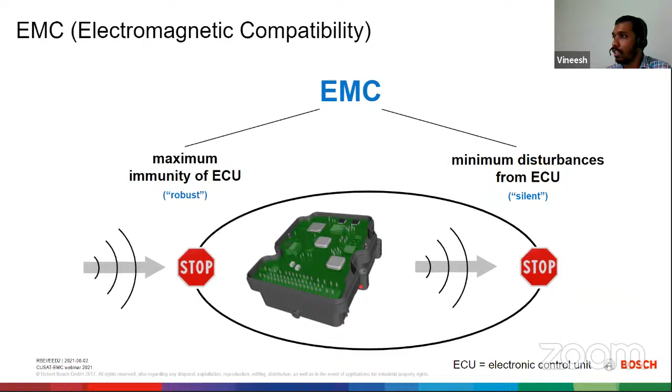So yeah, going to the next slide, you can see here, for example in the automotive world, when the unit goes into the external world, it can be interfered with. There are a lot of interference factors, which you might have already seen, like radio transmitting towers. There could also be radars, like military radars or airports. All these emit noise.

Apart from this, your unit is also an EMC source. When it goes onto a street or highway, it becomes multiplied, because there could be n number of such ECUs in different vehicles, so altogether it can lead to clustered interference. Apart from that, there are also static discharges, when your body gets charged up and discharges into the unit. All these are taken into account in designing.

How do we take care of this aspect of designing? We have testing. You have specific testing chambers that are needed to comply; that's how EMC compliance is met. You test these issues in predefined labs so that you are within the limit, you know what emissions are coming, and how much noise it can withstand. That's basically what we talk about when you go to the external world.

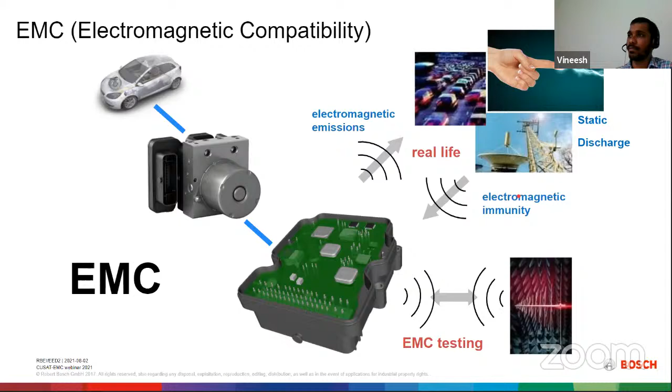Before I go deep into EMC, I would like to know from the audience, have you experienced any EMC in your day-to-day life? Maybe you can unmute so that it's live and more interesting. Or maybe, why do you feel EMC is important, especially when it comes to automotive? If anybody wants, you can either chat, put a ping, or unmute and speak yourself. I can wait a minute.

Yeah, Vineesh, we usually experience EMC when we receive a phone call and speak to someone. That's a natural one. Correct, usually everyone should have experienced that. That's one basic interference you would generally have met. You could hear the sound of interference from the mobile. So this is a kind of EMC.

Thank you Sujit for that. I think it's Sujit, right, who replied? Yes. Okay.

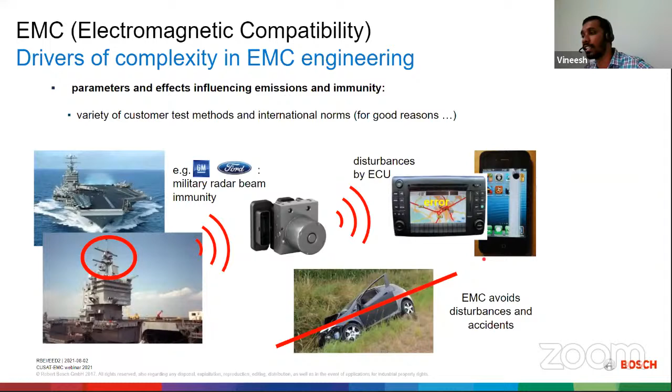So there are cases where it happened: accidents, a lot of failures, and those are the lessons learned from the industries, from the OEMs, from the tier one suppliers. They have now learned from previous experiences on this. So there are the external fields as well as the internal fields. Right now, what I am explaining is the external field. Now it goes to the internal field.

So in the internal field, this is a general view. You can see a car is no longer purely mechanical. It is tied to a lot of electronics. Even if you think of the very simple component, the battery, it's no longer a simple battery. It has battery management units. It has high speed buses, low speed buses, and electronic control units communicating every minute, every second, or millisecond,

like ABS, which looks at fractions of a second. So these all should not get interfered with. When you are at the wheel, these are all working together to achieve the goal that the passenger should be safe and should reach the destination.

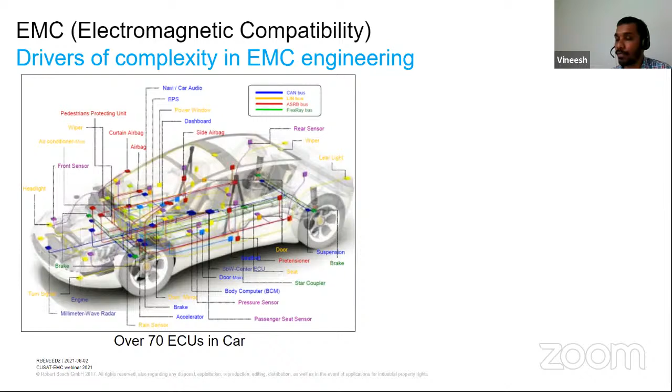So when it comes to this one, you see the routing in the harness. This is the complexity you see. The routing itself is so complex, it can itself act as an antenna. So inside a vehicle itself, it could cause interference. These are all the factors we have to look at when we look at an ECU, an electronic control unit, designed inside a vehicle.

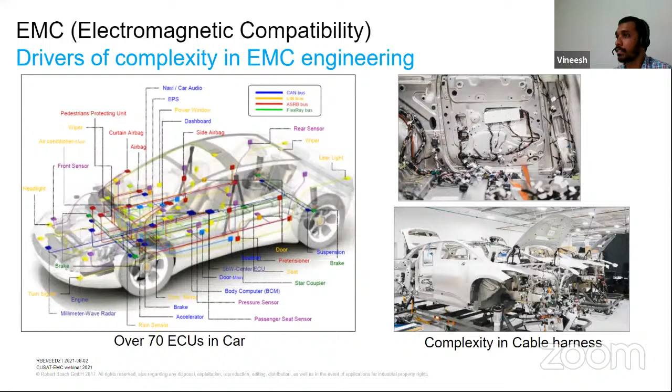So this is another aspect of EMC that speaks about the vastness of the EMC we are dealing with. For example, EMC doesn't just specify radio frequency or microwave frequency. It starts from a very low frequency, like kilohertz or hertz, and can range to gigahertz, like 6 gigahertz, 12 gigahertz. And due to more and more usage of the spectral content, we are also asked by the customers to go into higher and higher bands. Because the noise is spread across the frequency spectrum, we have to be compatible. That's why we have to deal with all these frequencies.

Looking at the power, you can see that the power we have to withstand is like 2000 watts, whereas some GPS module has to function maybe at a millionth of a volt. So imagine the scale as a 1 meter flag compared with the distance to the moon. That's the vastness we are dealing with in the ECU. You have to withstand huge power, and also operate at very low power levels. These are some of the things you have to deal with when you go into the EMC world.

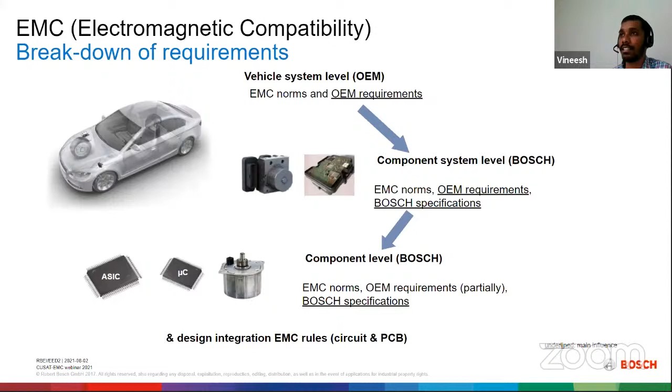So basically the trend, I think that may be coming in the next slide. For example, the power level we have to meet at the vehicle level is 100 volt per meter. The ECU would have to meet like 200 volt per meter, and at the component level it will be much higher, like 400 or 1000 volt per meter. That's how the requirement goes on. These all get derived from the experiences of the tier one suppliers and the OEMs.

When we are not doing pre-compliance tests, design or simulation at the very early stage, you will have a lot of failures at a very late stage where you don't have many options, spending more money and effort, shifting the timeline, and later customer dissatisfaction. That's why EMC in the early design cycle is very important for ECU design. Not only ECU, it also applies at the vehicle level and IC level, but right now we are talking about the ECU level.

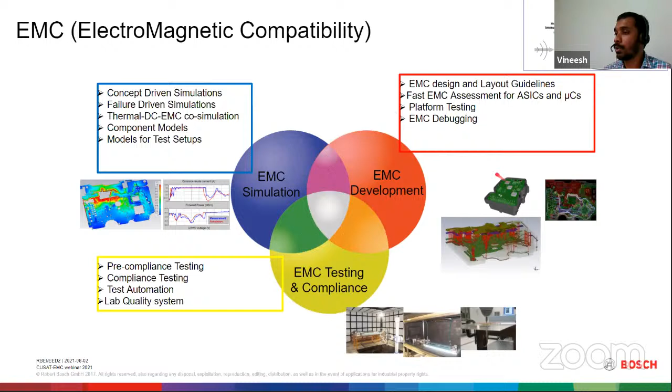And the quality wing looks after whether the equipment being used is proper or not, whether you are injecting the proper amount of power, whether the transfer characteristics of the antennas or the devices being used are proper or not. So these are the wings, or the branches, of EMC testing and compliance. So yeah, let me move on to the next slide.

So what happens is that when your equipment is a noisy equipment, all these lines will be acting like an antenna, like a carrier. It will be a conducting medium. It will carry this noise to other equipment. So this equipment can cause failure. That's why you have conducted emission being tested. So conducted emission is the emission that is going out from the input line or output line. So that's what conducted emission is.

Similarly, the opposite is conducted immunity or conducted susceptibility. When you have the power line, there can be other equipment that could cause noise, like sudden switching, turning on and off the inductive motors or the wiper motors. Suddenly you turn them on and off, so there are a lot of spikes that come into the power line. So since the power lines are shared between different ECUs, all this noise will travel into the equipment.

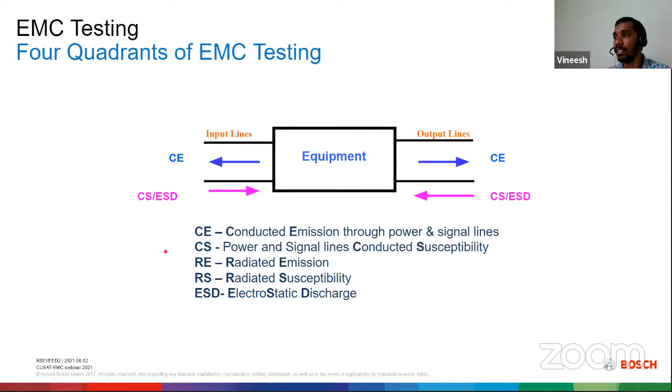Okay, so another aspect shows why, when you go from component level to system level to vehicle level testing, the levels get stringent. At the component level, the effort and cost is like 10 to 15 lakh, whereas when you have to adhere to the norms for testing in the ECU, it goes to 20 to 30 lakhs. And when you go to vehicle level or system level, it goes much higher, almost 5 times compared with the IC level.

Similarly, the effort scales up drastically from component level to ECU level to system level, because there are n number of factors. For example, in the vehicle, you have more than hundreds of ECUs working together, so it will be very difficult to root cause. That's why there are limits that go into the ECU. It's a similar case when the ECU has a number of ICs. Something that can be dealt with within the IC will be much cheaper, easier, cost effective and less time-consuming. But when you have many ICs within the ECU, you will sometimes have a nightmare.

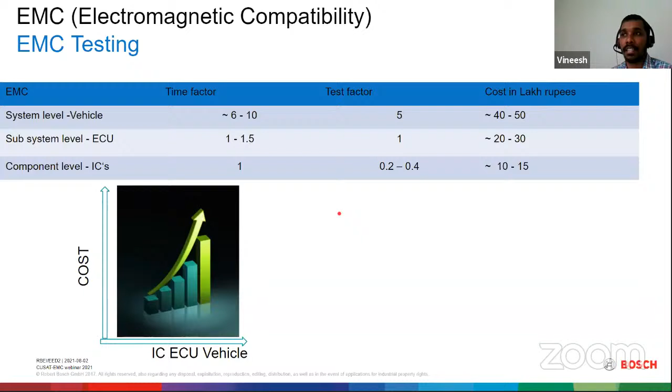And when it goes to vehicle level, with many of them, for sure there will be a nightmare from the EMC side. So that's how critical it gets when it climbs from component level to subsystem level to system level.

Now this is another aspect. These are some of the test facilities available in Bosch. Some are available in Bosch Koramangala, and some are in Europe or outside the country. Here you can see what I was explaining: from system level to subsystem level to component level, the test level requirements get more and more stringent.

So it goes like 100 because there are many things that are involved while deriving from 100 volt per meter to the 200. And when you go to IC level, like 4000 volt per meter, one of the simple things is, for example, in the vehicle you have the harness length. Whereas here during the testing for the DUT, you have just 1.5 meter, whereas there you have 10 meters also. Even the low frequencies can easily couple, even with a low power, it can easily couple the energy and throw it to the ECUs.

That's the reason why you have an increased power level, because it's a standardized length, maybe 1.5 meter, or for different testing they have different lengths. Roughly it's below 2 meters mostly. So what happens is that the energy level that could enter is less, so to mimic the similar case, you have to inject more power.

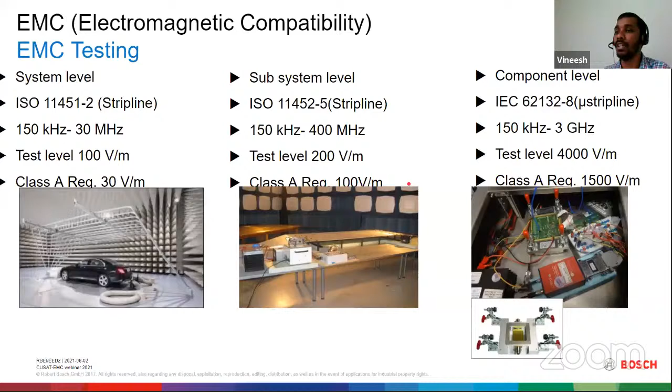And these are the jigs that are being used for the testing. You could see the test setup in the test setup details anyway. For the component level, I will be explaining in detail in a few minutes. So I think this you are most familiar with. Maybe this is already available in the CUSAT, which is a fully anechoic chamber. But most of the testing for the automotive world, we test in the semi-anechoic chamber. So here we have the ground or the complete.

Yeah, sorry. Maybe somebody can mute. Yeah, thank you. Yeah. So just I will go through quickly.

I think most of you are familiar with what the anechoic chamber is. So why are we testing in the anechoic chamber? Basically, your DUT will be tested on this bench. This is the conductive bench. This mimics the chassis of the vehicle, and this mimics the earth. So it's conducting. Here the DUT will be placed, and for example for radiated emission, you have to check the emission noise from the DUT.

You do not want the interferences coming externally, like the FM bands or AM bands and the mobile transmitter bands. All these bands can interfere, and you will not be able to understand what emission is coming. So that is the basic necessity why we test radiated emission and conducted emission. Also radiated immunity is tested there, because you are injecting huge power into the system, and it should not interfere with anything external, and the operating persons should not get affected.

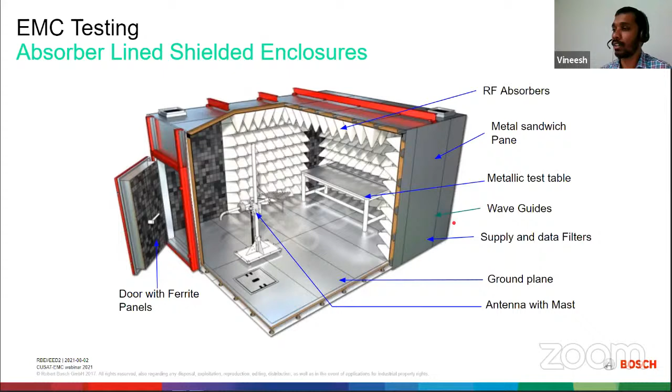So that's why all these tests are conducted in the ALSE chamber, absorber lined shielded enclosure. There are waveguides through which the optical lines interact with the ECU. The ECU will be placed over here, and you have the accessories loaded. I will explain these things anyway. The optical communication will be taken through these waveguides, and you have different antennas for different bands. So this is the basic overview. I think most of you might know about this ALSE chamber.

So let me go into some of the testing. We have this test setup in our Bosch Koramangala. This is the radiated emission test setup. In EMC testing, as we talked earlier, one of the quadrants we look at is radiated emission. Here we have the ALSE chamber in which we will be testing. You have the biconical antenna, which tests the frequency range from 30 megahertz to 200 megahertz. You have the DUT placed over here, and it will be loaded; for the loading purpose you have the accessories.

For example, it has to drive some inductive load or some resistive load. That will all be done by putting in a load box, or you have this accessory. Or if you want to communicate with the DUT over here, you have these communication buses over here, where optical communication will be taking place.

For example, you have to have CAN communication. CAN is the controller area network; earlier it was one of the main communication buses that was used. So, for example, you want to communicate with this ECU; you have to check the frames, whether it is operating with proper functionality, whether it is properly loaded. So you have to check all these features.

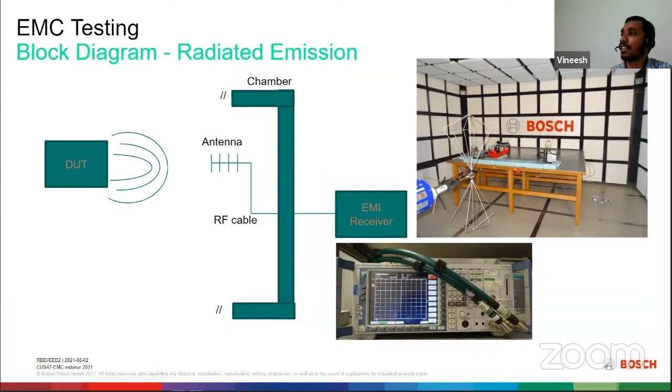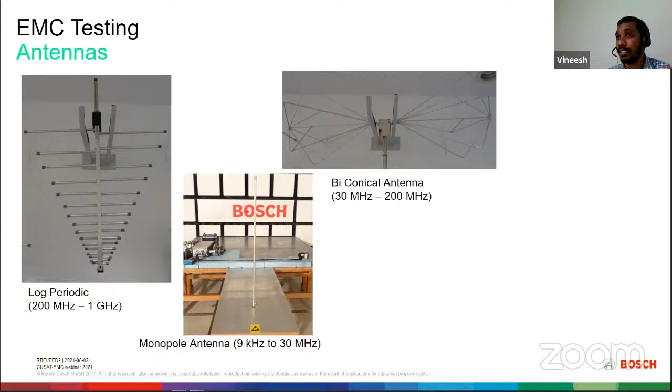Then for the higher frequencies, above 1 gigahertz to 12 gigahertz or higher, you have the horn antenna, which most of the time will be facing directly towards the ECU. It will be placed 1 meter away, but not in the middle of the harness; it will be directly facing the DUT. So that's the test setup. And for low frequency, you have the monopole antenna. So these are the basic setups for the EMC radiated emission test.

The radiated immunity test setup is almost similar. The only thing is that you will be injecting power and monitoring the functionalities. Earlier you were putting it into the operating mode; here you will be monitoring during the injection. Suppose you are injecting some frequency like 200 megahertz. You check whether it is functionally there, if the bus frames are okay, if the drivers are okay.

If the memory units are okay. So you check all these procedures for each frequency. Once it is okay, you step into the next frequency, 200, 202, 204, or something like that; it may vary logarithmically or linearly, again based on the customer requirement. The main thing you can see is that the log periodic antenna is a little big; it is designed to withstand such huge power.

So you will be injecting like 700 watts or 400 watts of RF power. The previous antenna which I had shown may not withstand these powers, so you have bigger antennas, or a design that takes care of this. And again, the distance will be 1 meter, and here you will be monitoring the DUT.

You can see a lot of optical cables; there are a lot of communications happening over here. These communicate externally for loading as well as monitoring purposes. You will be connecting with maybe a laptop or something that interfaces, so you will be checking during the operation mode. For these you have the communication buses.

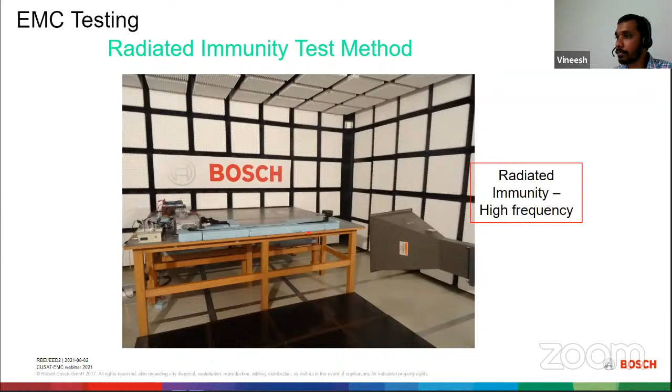You may not always be looking through the communication buses. Sometimes you have the clusters, you can see the front panels. You have to see whether the odometers are working properly, whether the LEDs are blinking properly. These are monitored externally through cameras. During the injection, there will be a camera inside the chamber which can withstand the huge power, so you will be monitoring the functionality of your equipment during the testing. So this is how the immunity testings are taken care of.

Here this is the DUT. Again, it is done in a shielded room with absorbers like ferrite, because you are injecting power. It should not go outside and interfere with other units, because there's huge power, and also it can affect the person who is in charge of the testing.

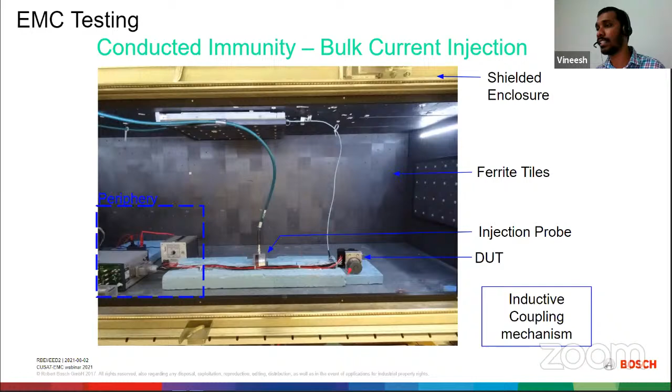And you have the injection probe, which I explained previously. You are injecting, suppose, 200 milliamps or 100 milliamps from the amplifier. It goes to the directional coupler. Here you also look at the VSWR, what reflection is coming back, which is also monitored through the software, and you inject the RF power into it.

Once you inject, you look at how much power is getting injected. For example, you want 100 milliamps of RF power into the cable. You monitor through the power meter whether that much power is getting injected into the harness. Going into detail, there are a lot of tests, like open loop and closed loop, but let's not go into detail.

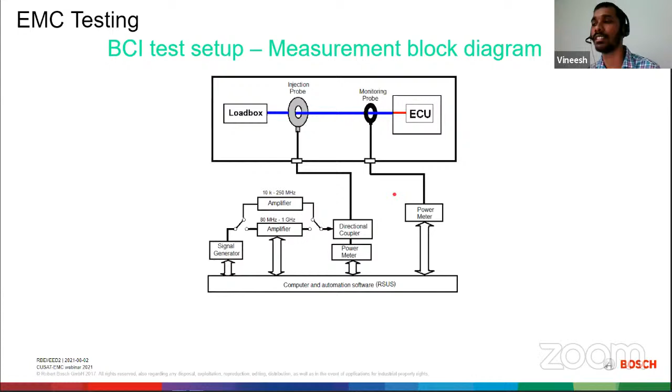This is a very basic touch on the BCI, so that you get an idea of what is being tested. Again, it's a similar test for the conducted immunity. This is what I also talked about earlier: the power lines or the input output lines could go everywhere. Pulse 1, pulse 2, 5A, all are something related specifically to power lines.

For example, pulse 5 is when there is a disconnection from the battery, and only the loading is from the alternator. So what happens is that it will not be a direct DC 12 volt anymore; it will go for a short duration to 70 volt, and then it comes back to 12 volt again. It's basically the charging, and due to the inductive nature of these inductive loads or the alternators.

So similarly, there are different pulses being tested for the power lines, as well as in the communication lines. Pulse 3A, 3B is a similar signal that could arise from the wiper turning on and off. So small inductive loads turning on and off can shoot up to 150 volt for a short duration. So all these aspects have been taken care of during your design. These are some of the pulses that we inject.

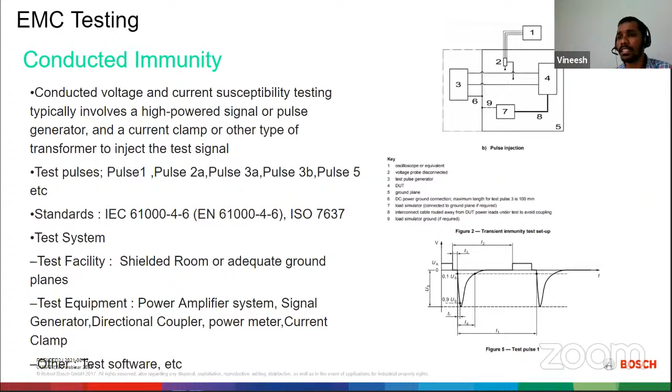There could be resistive loads or inductive loads inside a load box setup, and you have the communication buses, LIN or CAN or FlexRay. They will not be communicated directly electrically outside, because they can carry the noise into or outside. Since it's conducted emission, we do not take any electrically wired things out unless they are purely filtered. That's why optical cables are relied on, especially when you have communication buses to be monitored. You convert from digital to optical, and outside you convert back from optical to digital, and then you look at the bus frames.

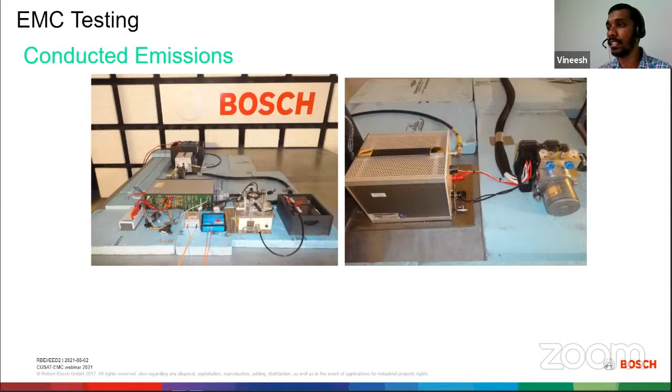And this is one of the things you might come across in day to day life, or most of you might have seen this one: air discharges or static discharge. When you walk across a carpet, your body can get charged to 20 or 30 kV. So when your body is charged and you go into the vehicle and touch the knobs of the infotainment, or the airbags, the discharges can go into these units and can damage things.

So it can be, or maybe there may be technicians who are handling it; they may be turning it, operating it, removing the harness, and checking the connections. At that time also, if their body is charged, it can go into the vehicle harnesses, into the ECUs. So all these things are being tested here.

To mimic this: these are the conditions, or sometimes when you are manufacturing, you have the handling cases, you are taking the unit and putting it into the vehicle. So again, the technician might have a charge himself, and he discharges into the DUT. So all these things have to be tested so that it doesn't fail before it gets into functional use, or during the functional time, due to these electrostatic discharges.

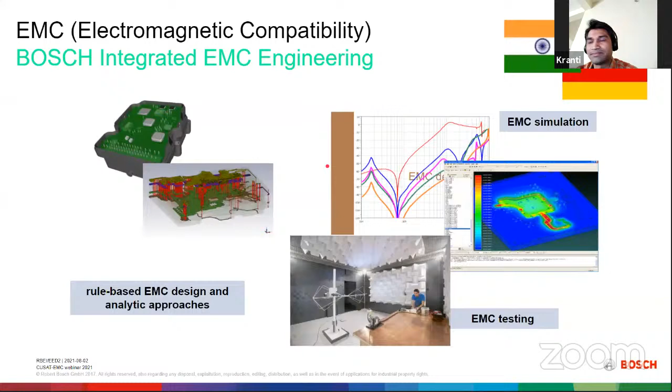Okay, so now let us try to understand how we do simulation for EMC. As we already saw, in EMC we are talking about emissions or immunity of your DUT. The DUT is basically an electronic product, right? If you just keep out the active parts, most of the things you see are traces on the PCB, components, passive components and all. So basically there are currents flowing through them. There will be some kind of fields coming out from them, and they can be coupling, they can be radiating. So basically what you see is some kind of electromagnetic phenomena taking place, right?

There are some excitation places where the signals are sent from one transmitter and they might be received at some other place. So there are excitation sources and there are receiving sources or loads. So basically what you're seeing is an electromagnetic system. For this moment we are leaving out the active components, but the rest of the circuitry is basically in an electromagnetic environment. So how can you identify the currents or fields in an electromagnetic system? It's simple, right? You have to solve Maxwell equations.

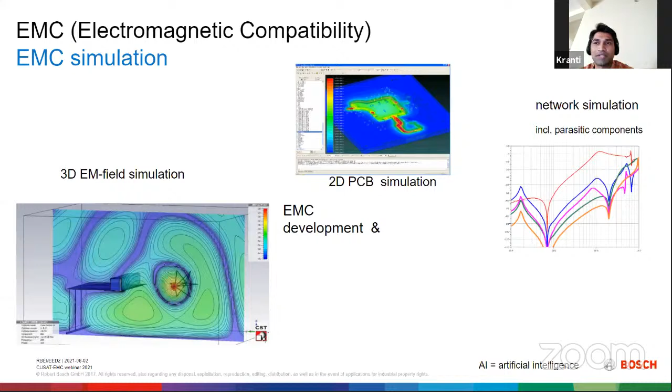So here I'm just trying to detail what I was talking about. On the corner, you can see the actual setup where you have the biconical antenna, right? That is radiating. And there on our table is our DUT with the harness. So the same environment we are trying to create in the virtual setup, or the simulation setup. So we should have the model of the antenna. Then you may not be able to see the DUT properly on the table, but you can see some box.

So in this box will lie our DUT, harness, and everything. So we have a strategy where we divide the simulation into different domains. Why, I will tell you later, because sometimes when you're solving a very big problem like this, an anechoic chamber, which is some 10 meter by 10 meter or at least a few meters by a few meters, 3 meters by 3 meters, if you start solving those kinds of things, sometimes it becomes too computationally expensive.

So we have a strategy: for certain parts we use one kind of solver, and for certain parts we use a different kind of solver. Maybe I can detail this in the coming slide, but just remember that it's not easy to solve a complex problem like what I'm showing you, because as you know, the solvers have to do something called meshing, meaning they try to break down the entire environment into small cells and then apply Maxwell

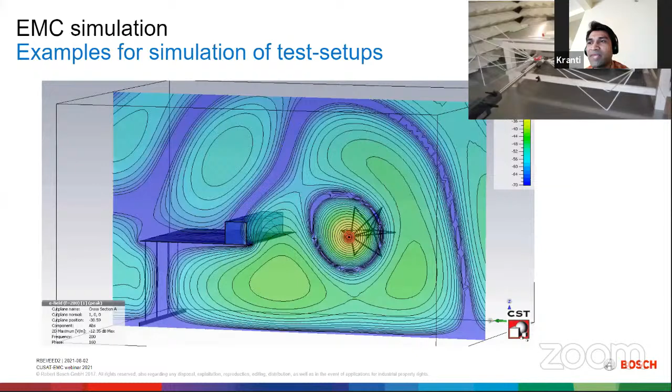So maybe when we come to that, I can talk about this. Yeah, maybe we can go to the next slide, Vinesh.

Yeah, so let me now come again to modeling. As I told you, when we are doing 3D simulations, we have to create different setup environments. For example, the first setup was where I was showing an antenna with the table and all. But apart from that, there are other things also, for example, here we also have the TEM cell, which is shown there.

So all these things sometimes have to be developed in-house, because we are not directly getting all these models from an external vendor. And as I told you, these models are not coming only from the one business unit, but also from a corporate research unit, which is already developing these models and sharing them, because these are general setups, general components used in your test setups, like antennas, TEM cells, strip lines, or ESD gun models and all that.

So all those things are already developed in-house. We have an extensive library of test setup models, antennas, all that. Apart from that, each business unit also has to develop some things. For example, our braking unit is one kind of system. So it will have certain parts: a PCB, a motor, some mechanical connection, housing

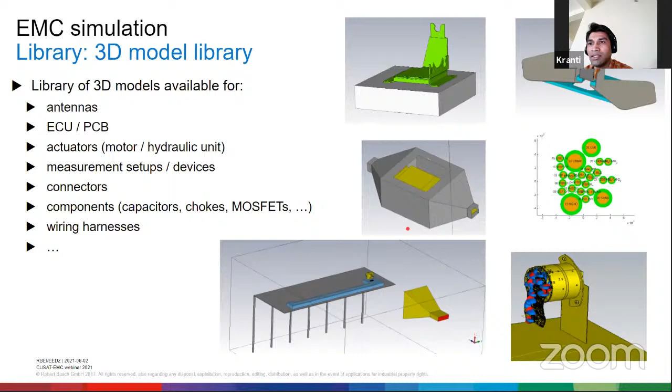So the harness is simulated in a different solver, and all these models coming out from different solvers, or even from measurements, or even from vendors, are put together in one particular setup, and we then do the combined simulation, or what we call co-simulation in some cases. So this is how the simulation activities are done, involving all the modeling at different levels. We can go to the next slide, Vinesh.

Again, here is the same example I was trying to show. We are talking about the horn antenna. I'm trying to show you how the fields excited from the horn antenna, how your table is reflecting them or diffracting them into different directions. So basically, this is how we can really recreate the real situation of what is happening in your measurement chamber. I think we can go to the next slide.

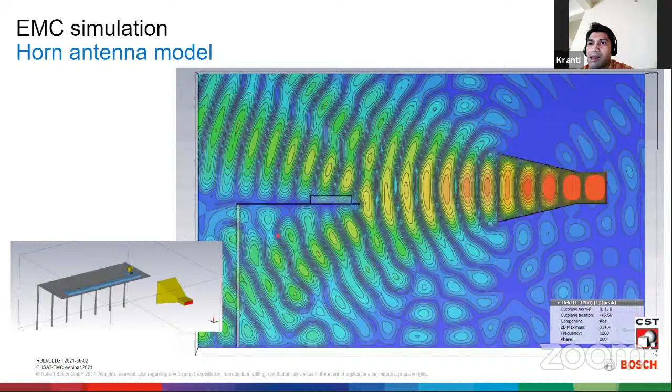So one more thing, as I told you, the component modeling also has to be done extensively. It's not that you can just use a simple RLC model everywhere and every time. For example, here we are talking about a simple capacitor. For the capacitor, you might get some simple S-parameter data from the vendor directly from the site, or if you ask them, they can share it.

But these models are linear models working for a certain frequency range. Maybe they are not done for all the frequency range you require. So you need to get a model that works for higher frequency. What to do? You have no other choice but to do the measurements. So we also do in-house measurements of these components and extract those models. And we also have to keep a library for all these models. This is about the linear behavior.

But in EMC, when we are talking about immunity or ESD, it's not always linear, even for simple passive components like capacitors or chokes or ferrites, when we are injecting high voltages or high currents into the system. For example, an ESD capacitor under a 25 kV ESD discharge can see voltages of more than 200 volts across it. So that capacitor you modeled as 10 nanofarad or 1 microfarad will no longer be 1 microfarad or 10 nanofarad; it gets derated, meaning at higher voltages it will go down. So for that, we also need to create a large signal model.

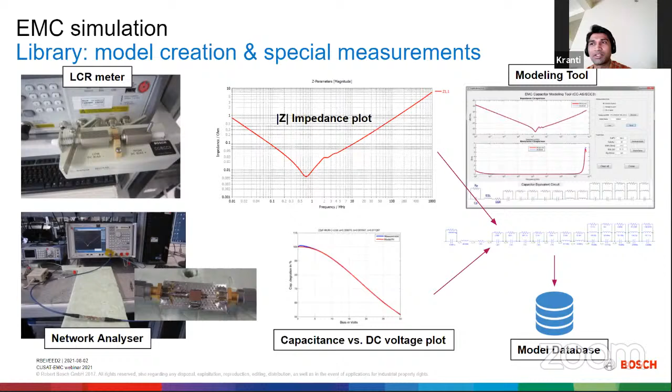So now in the next few slides, I'll just give you one simple design philosophy we use using simulation. How to optimize, because this is what we also try to see, right? How we are trying to incorporate simulation approaches in the very beginning to try to solve or at least optimize the designs in the very beginning stage itself. So this is what I'll try to show in the next few slides. I think Vinesh, we can go to the next slide.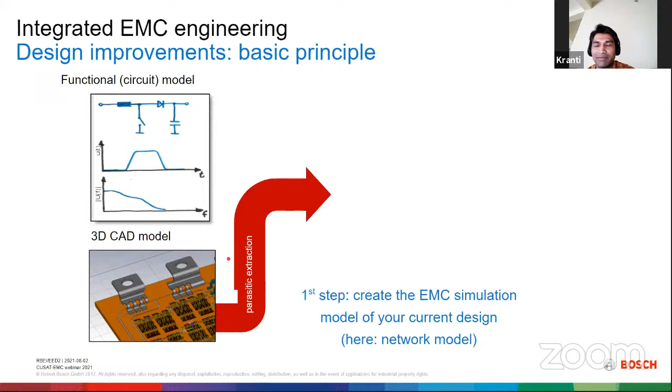But once you incorporate all these models into the actual PCB, right? On the PCB, you cannot connect them with a very small trace. You have to connect with some finite element trace. Or sometimes the models will have some package parasitics, right? So those things also will come into the picture. All those things together will create a completely different behavior.

What you had as smooth rise and fall times, all of a sudden with these PCB parasitics involved, or the package parasitics, or some mechanical parts that are connecting them, all those things can all of a sudden destroy the smooth behavior of your circuitry. And they can cause some kind of overshoots or ringing in your system. And this is what will actually cause the emissions for your system, right?

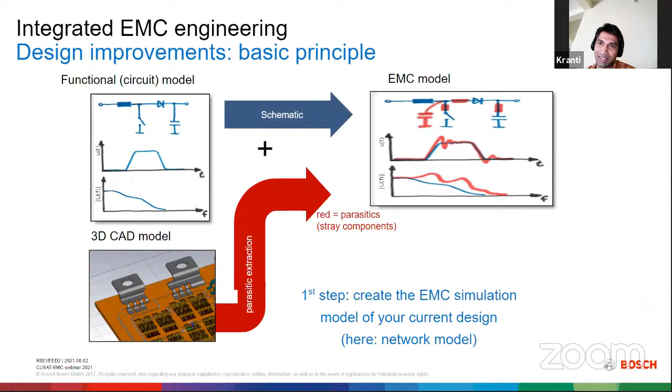Because all these transients will create noise on the power rails, and these power rails are what you measure during your CE setups, or even directly in RE emissions you can see the power rail emissions. So all these things can create problems. So what you have to do is, at the design stage itself, incorporate the effects of your routing, PCB, and other structures which will become part of your model.

So how do we do this? How do you optimize this? Once we have extracted certain parameters from the 3D model, we combine those 3D model parasitics in our circuit simulation, and then do the simulation. Once you do the simulation, you see this red curve with ringing and all that. Now we have to find what parameter is causing that ringing, and how I can optimize that. Can we go to the next?

So now this is what we try to see: there is some parasitic capacitance coming in parallel to the switching circuitry, and there is some series inductance in the diode. Let me tweak this thing, let me tweak that, and let me see whether my ringing is reduced or not. So we do this, and we'll get to know that by varying this parameter, we will be able to optimize this.

So once we did it at the circuit level, then we have to see how we can incorporate whatever changes we have done for those parasitic capacitances or inductors in our simulation. So we go back to the 3D model. I think we can go to the next slide.

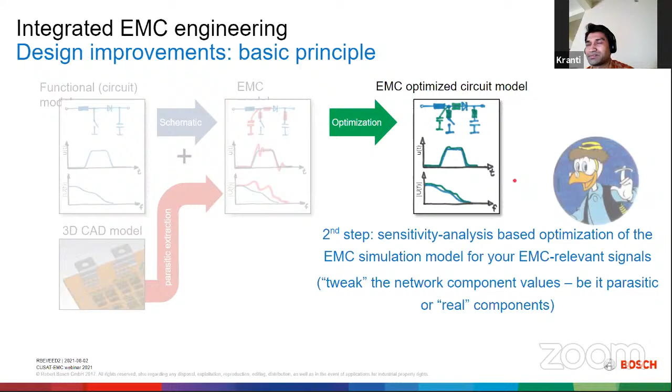Yeah, so this is the next step where whatever things we have seen that improved the behavior of the transient, I'll try to now incorporate. For example, here the pins were separated and they were giving some big loop inductances. Now, as soon as we have brought them together, the loop inductance has reduced, and then we are able to optimize it. So these kinds of things we'll first see from the circuit simulation,

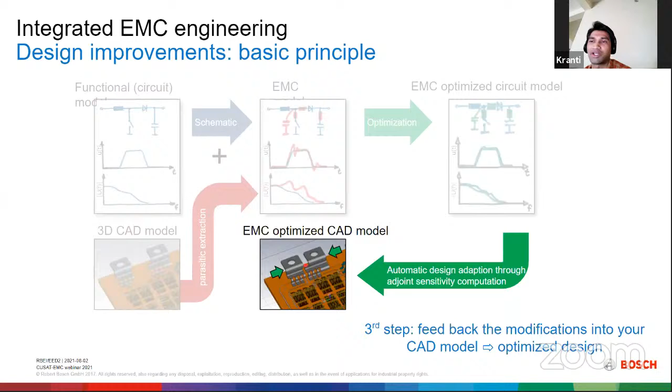because in circuit simulation we can do a lot of things easily, because in the CAD geometry you cannot always change and again run a 3D simulation. So from a CAD geometry, we are actually generating a simplified RLC model, and that we are tuning, then identifying which parameter was tuned, and then we incorporate the same changes into the CAD model. So this is one of the ways we are trying to optimize our designs, not only at the component level itself, but even at the PCB level routing or component distancing, placement, and all that.

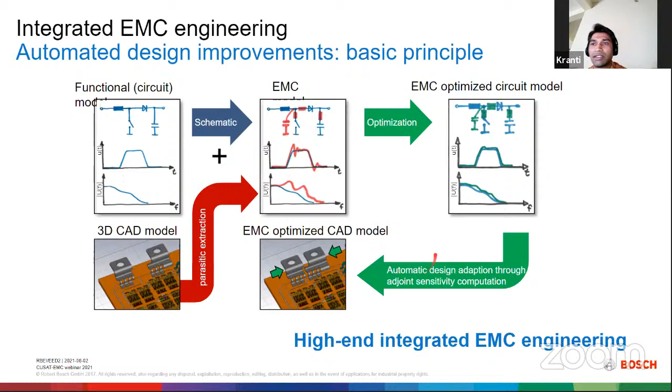Yeah. Yeah, I think we can go.

And then we have to match with the trends of the measurement. When we know we are good with the models, then we try to optimize them, find the root cause for that resonance, then identify which parameters can be changed or optimized to reduce that problem. And then we incorporate that change, do a remeasurement, and see whether we are meeting the requirements or not. So this is general simulation and measurement, how we work as an integrated team and solve problems.

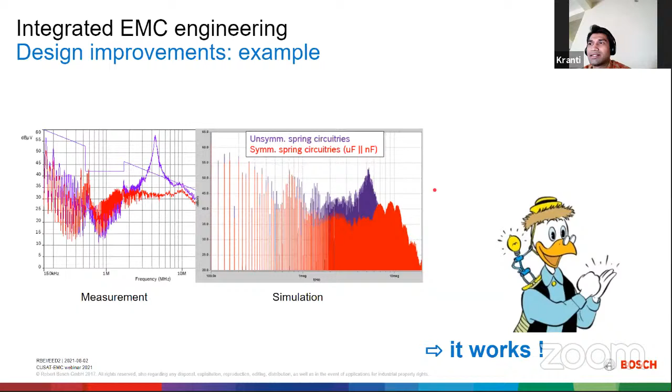Yeah. I think that's the thing from my side. Hopefully I could explain whatever we do in Bosch, particularly in the simulation area, at least a few things as a bird's-eye view.

Yeah. Kranti, you have some questions in the chat box. You can go through that. Yeah, sure.

Okay, the first question is, other than CST, what other software tools can be used for EMC simulation? For 3D tools, there are many available in the market. For example, ANSYS HFSS tools are at an equal level, I would say, and they also have the same kind of structure as CST. They are also based on 3D tools. Of course, the algorithms, the modeling or the meshing techniques can be slightly different, but more or less they are also there apart from CST.

I don't have much extensive idea, but one good tool apart from CST is HFSS, or ANSYS. Again, CST is not just one tool, but a suite. As I told you, sometimes you have a 2.5D solver, sometimes a 3D solver, sometimes a circuit solver. So it comes as a suite. In that itself, you have a 2D solver, a 3D solver, again 3D solvers for different kinds of meshing techniques or different situations, for antennas or antennas placed on platforms and all that.